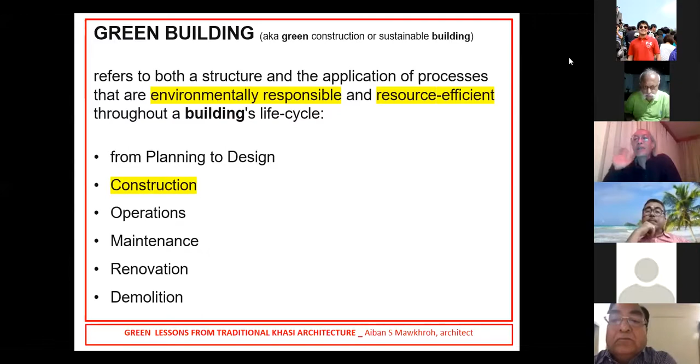Okay, let's go to context now. For people from outside the Northeast, here is the map of Meghalaya with the Brahmaputra to the north. When it comes to traditional architecture, there are basically three typologies. One is the houses of the Wars, who live on the slopes overlooking Bangladesh, you can see Sylhet there in the south. Then there are the Bhois, who have another typology and border Assam, you can see Guwahati to the north. And then you have the traditional architecture of the highlands, the plateau, as Arijit Da had said.

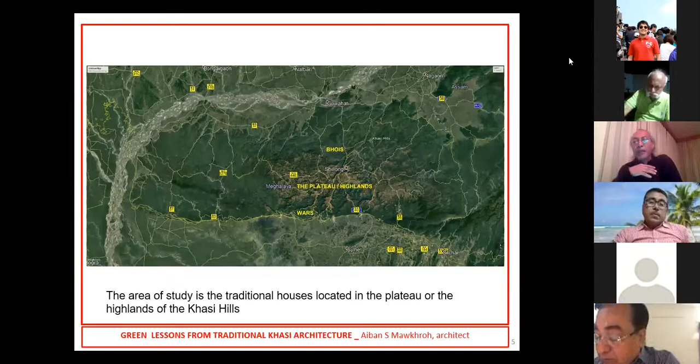These are windswept areas, very hard hit by rains and a lot of wind because of the open ground. There are a lot of climatic parameters these houses had to withstand. Apart from that, this is one of the highest seismic areas in the country. We are right now in zone 5, and we've been hearing earthquakes in recent days, in fact in Mizoram, very close by, with epicenters even near Assam.

So it's windswept, with a lot of rain and a lot of fog. It's very damp. The climatic conditions are very extreme in nature.

For the sake of this paper, I have divided the traditional Khasi house into two types. One is the original Khasi house that our ancestors have given us. The second is the bungalow type house, the post-earthquake house, or the colonial house, the house that the missionaries introduced to us.

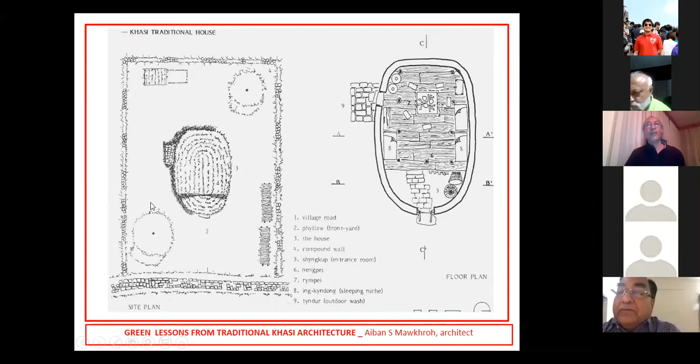So please remember the word I'm using: a U-shaped enclosure, and right at the center sits the traditional house, very egg shaped in plan. In fact the egg shape is so detailed that even the back has been cut, just like if you cut a hard-boiled egg, the top part with the air gap looks exactly like that. So it's a very pure egg shape.

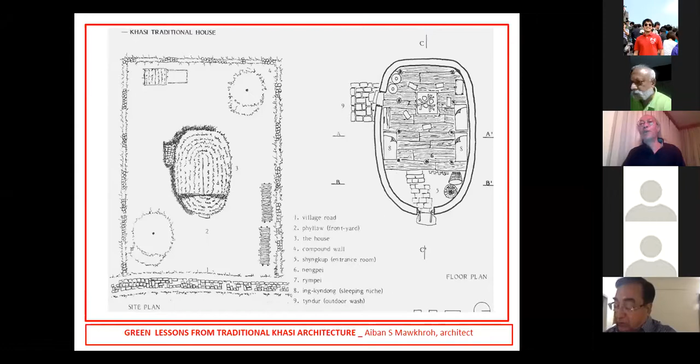We'll talk about the structure later, and just run through the types and variations of the house. In the egg shape, if you see the black dots, those are the columns, and then you have the egg shape of the form, made out of a 2 feet thick limestone wall. Within the plan there are two levels. You enter first into a ground level, which is earth, then you climb up a few steps, 3 feet above, to the habitable area. Those drawings are of planks I've drawn to actual size, I've seen planks that are 2.5 feet in width. So those are plank flooring, elevated from the ground, we'll talk about that later.

Those are the sections and the elevations, they'll come in the other slides too.

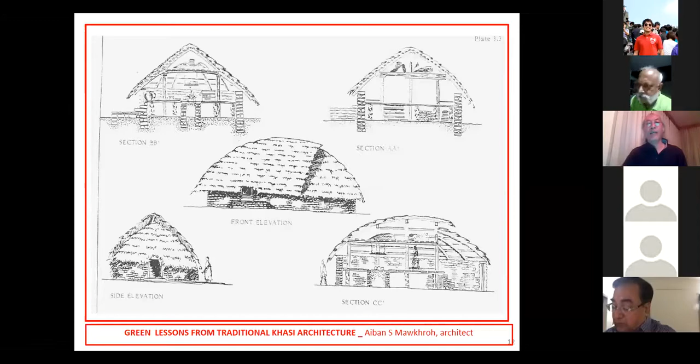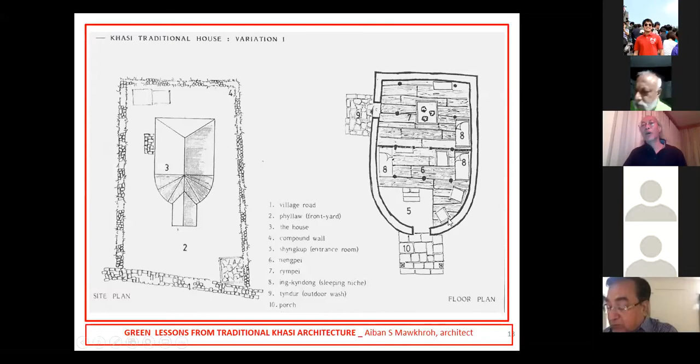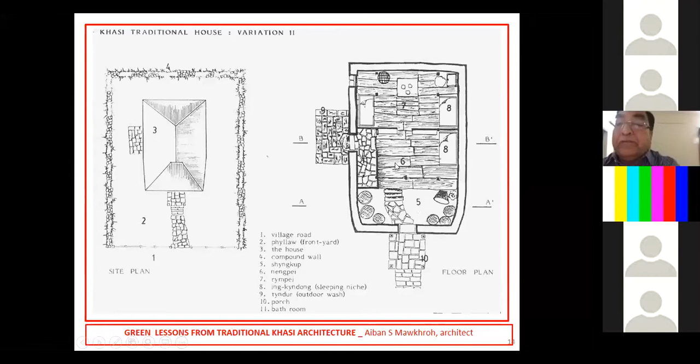This is another variation of the Khasi house. It still has the round front, but they've added the portico and more or less flattened the back, most probably to accommodate tin sheets, since instead of a thatched roof, the roofing is metal. But the interiors are still the same, those black dots are still the columns. Then there's another variation which is totally square, with a roof more like that of the bungalow house, but the interiors are still the same - you enter through a lower level and climb up a couple of steps to reach the habitable area.

So these are the three variations: the pure egg shape, then the variation where the back has been cut a bit and the portico inserted, and the third variation which is totally square with the portico. I guess the reasons for this evolution of the traditional houses is because of materials, changing from thatch to metal, and adding the portico maybe to imitate the bungalow type houses that missionaries or the British built for themselves. I guess in culture these things happen.

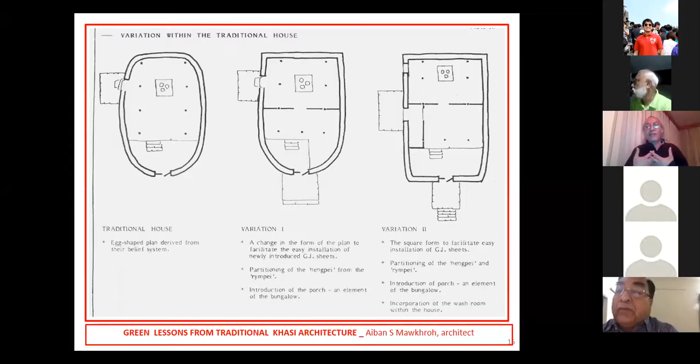So we should delve more into this, which is actually the core of what this entire topic is about. We can look at the plan in more detail, as I've mentioned - there are two structural systems here.

You have a post and beam structural system, which holds the roof. Then you also have a load-bearing wall, which holds only the eaves of the roof.

When I look at this and compare it to modern architecture, most new buildings now have an envelope where you have the columns inside, and then an envelope of either steel or glass, and then you have to AC the entire thing. So even the Khasis have this—you have the basic post and beam construction, and you have the walls on either side, an envelope of walls that surround the entire building.

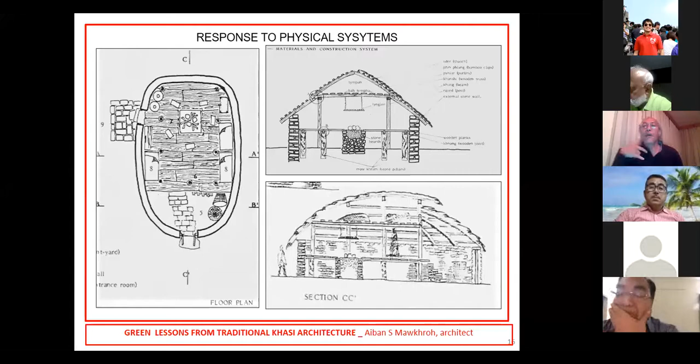The reason for this is that, being a seismic area, the post and beam construction is actually the ideal construction technology to take care of the seismic forces. But then you also have the other elements of rain and wind to deal with.

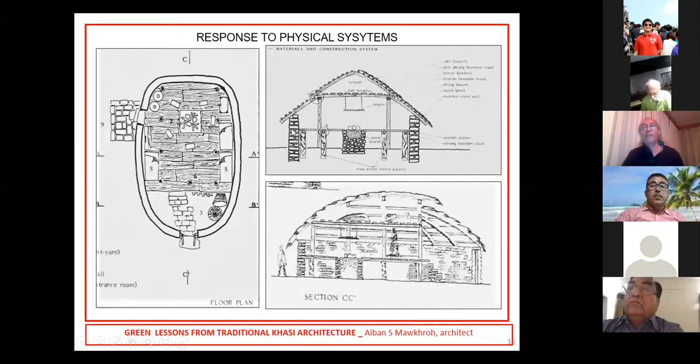Strangely, what the Khasis do is when you enter through the doorway, a very narrow door, you first land up at the ground level, which is the storage area, where people store their implements. In fact, you have your chickens and your dogs at the first part of the entrance. Then as you climb up the steps, you reach the habitable part of the house.

The Khasis used to call this edge, the division between what they call the shinko, the ground level, and that edge is called the shakso, which literally means the permissible area for the dog. So you actually move from the profane to the most sacred part of the house, which is the habitable part.

When you look at the plan of the raised platform, the spatial area is divided by these rows of columns, and also the hearth at the center. So you have the bedrooms at the sides, between the column line and the wall, and you have the living area, which is around the fire.

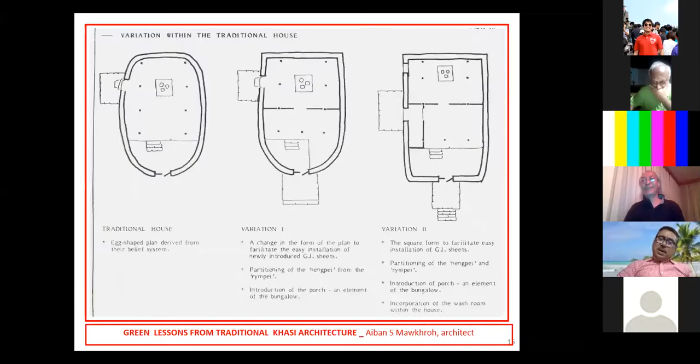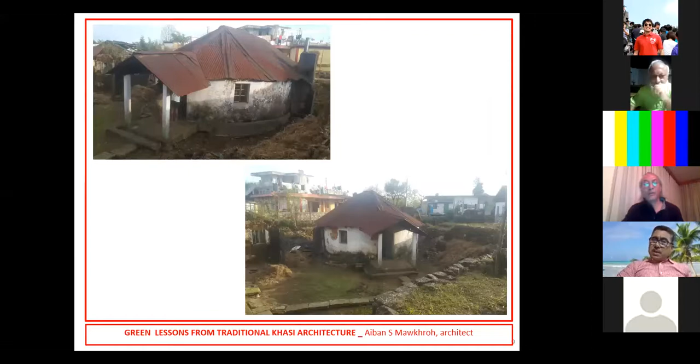We think we have learned a lot about earthquake engineering using computer analysis and whatnot, but when we look at traditional knowledge, people have learned through suffering. They might have suffered, and they understood how to build a better house before the next earthquake. But because materials are becoming similar everywhere nowadays, that's why we're reaching out to this traditional architecture, which is also based on very good structural concepts. So yeah, it's quite interesting.

Is this the first time you have learned about this, Dr. Jayant? Not really, but the way you are explaining it, this has not been explained to me by anyone else before. Today it's been a huge learning experience attending your lecture. There is so much knowledge in traditional architecture and construction that we have been ignoring over the years, and we should actually go back and try to find out. Maybe the solution is there to look at. That's what I feel. Thank you very much for bringing it up.

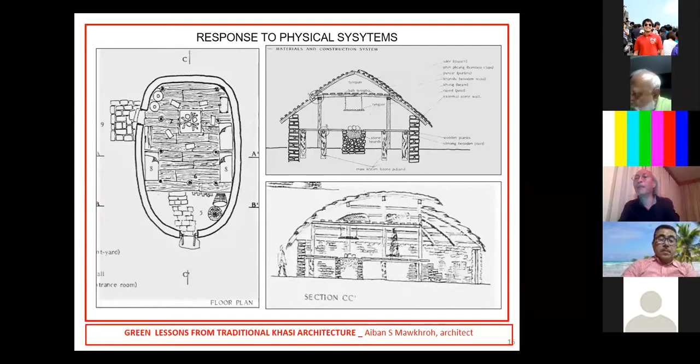This is because in the pre-monsoons in Shillong, not the monsoons themselves, almost a month before the monsoons there's a lot of lightning. I call it the sound and light show, with the sound of the wind and the lightning. I think the reason why people don't use metal too much is to not attract lightning, because the traditional houses are made of thatch.

So can I carry on now? One more thing is that the doors and everything are all pivoted, not with any metal hinge. Everything is wooden. Okay, carry on please.

So these are the pictures of the interior spaces. If you recall, you have the steps which lead from the shinkop. The shinkop is actually the storage area, the first space as one enters in the section. It's at ground level but enclosed, like an enclosed veranda. So you enter the house and you have the storage space.

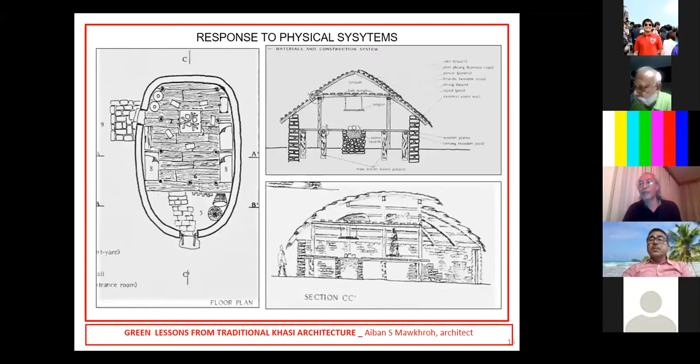Then you climb up a few steps to where the habitable part of the house is. If you notice the column, there's one column right at the edge of the steps. Very strange, that's a non-structural column. I mean, it doesn't hold the structure at all. The Khasis call it Rishot Blei, which means a sacred post, where rituals are done around it. As you can see in the drawing, it doesn't hold up the roof or anything at all.

So that is where the shakso, or the permissible area of the dog. What the Khasis are trying to say is that henceforth, as soon as you enter the platform, this is the most sacred area of the house, the habitable part, and animals are not allowed beyond this point. As I mentioned earlier, a lot of my thesis is on the cultural and belief systems of the Khasis, so that's where it comes in.

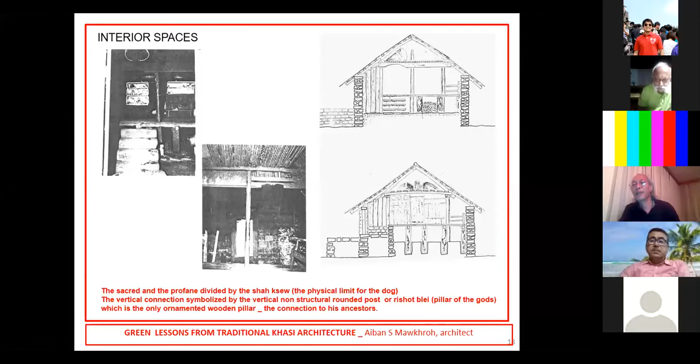Those are a little bit of detailing for engineers. You have the post and beam construction, and it's really interesting because since nails are not used, everything is done on carpentry, right from half cuts. Yeah, and that's the post and beam structural system.

You have the rafters, then you have the extension of the eaves, which rest on the limestone walls at the sides. That's a small detailing of the limestone pillars which hold the joists. In fact, the limestone pillars have a little niche at the top so that the joist doesn't move. This construction, talking about these limestone pillars and joists, is still being used now in a lot of villages in the outskirts of Shillong, especially the far-flung villages.

In fact, I've just done recently for a friend of mine who's got a resort in Barapani - he's got these tents, so the entire tent sits on this wooden platform, and we have used the same technology.

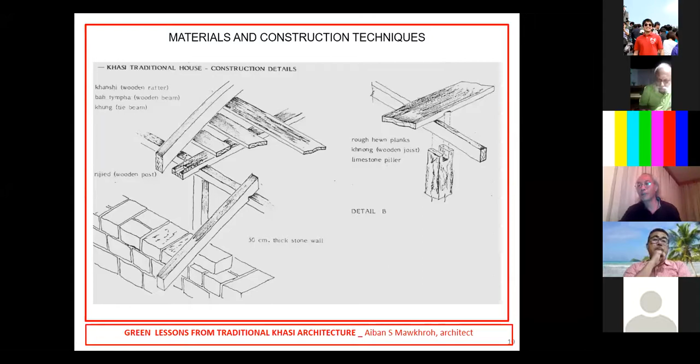These are pictures of that house which I showed you earlier. As you can see in the first photograph, there's a gap between the post and beam structural system and the load bearing walls at the sides. In between is where the beds are placed, and the post and beam takes care of the roofing. This is the shah ksew.

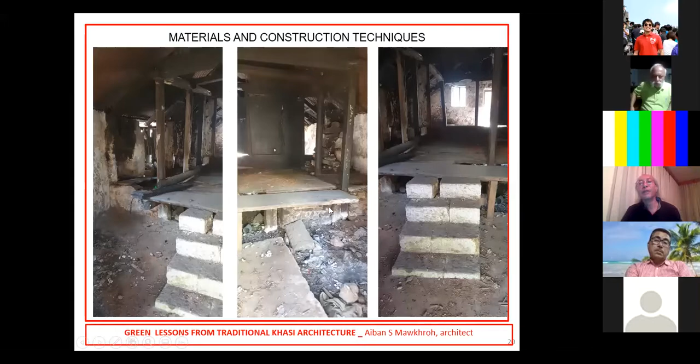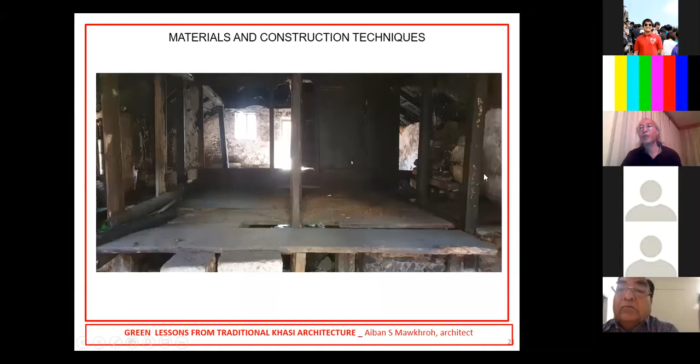You can see those steps going up to the platform, and you can still see little bits of the limestone pillars that hold up the flooring system. This is a picture of where you can see the long line of columns that divides the post and beam structural system from the load bearing walls, so in that gap there.

These are the three bungalow type houses which I've taken as my case study, and you've noticed the portico in front.

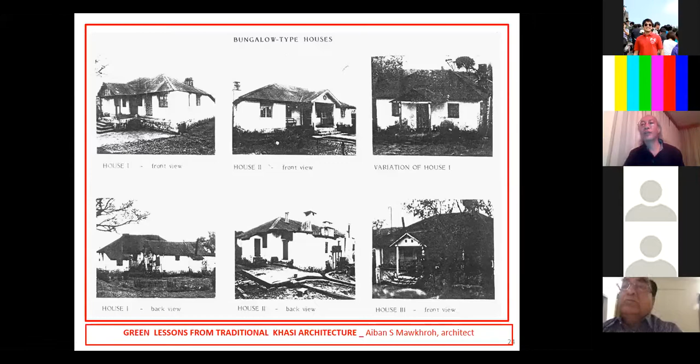These are the two houses which are still standing, the bungalow type houses I'll be talking about. You have the portico with the veranda in front. The one on the right is a beautiful house, very well maintained, still standing - in fact I think the owners have turned it into a bed and breakfast house.

That's another variation. Unfortunately this house has been dismantled, but thank God I managed to document the building at least.

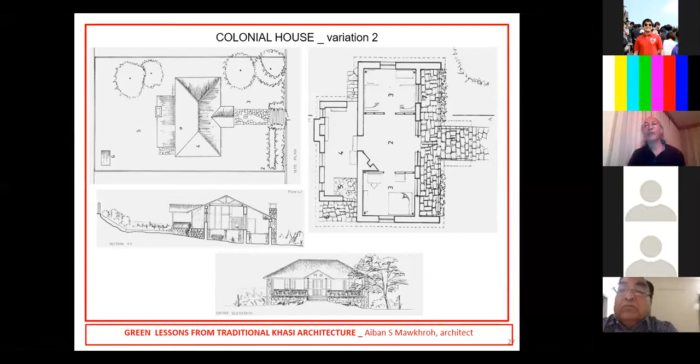This is the elaborate house. I forgot to mention that inside the bungalow house, can you see the small dots? Those are the columns - the post and beam system is still prevalent here, holding up the house. We'll talk about that in section. And then you have the external walls that take care of the other elements. But the only difference here is that the gap between the columns and the wall has become just 4 inches - in fact the columns are almost beside the wall.

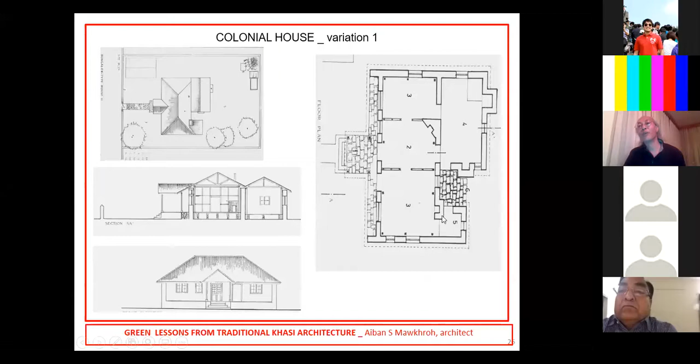Now even in the earlier house, if you notice, you still have the columns exposed inside the house. And the third house, this beautiful house, if you notice, there are no columns. The reason for this is because the owner of this house happened to be a contractor.

In the mid 19th century, in the 1840s or 1850s, there was talk of bringing the railway from Sylhet to Cherrapunji. As an East India company, they're not interested in bringing passengers - for them it's basically exploitation, how to exploit limestone as fast as possible, to take the limestone directly from Cherrapunji from the hills right up to Sylhet. So there were plans, and in fact the remnants of the engine of the train are still there. The David Scott Trail coming from Sobar, from the plains of Bangladesh, and the path is still there.

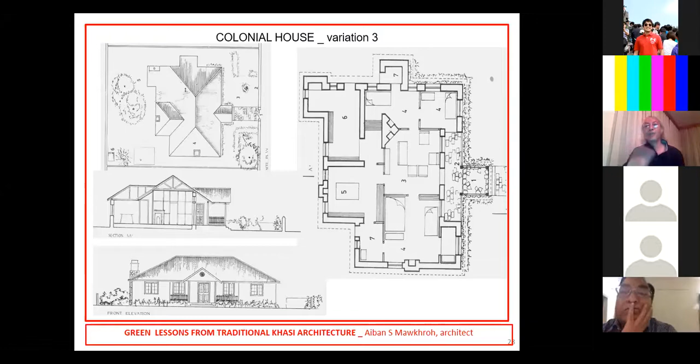So they were planning not to bring the railway per se, but more or less like a goods carriage, like one of those they have in the mines. It failed apparently because of the steep slope. So this gentleman who owns this house happened to be a contractor - he bought the steel, he bought the railway tracks, and he used the railway tracks as columns. The columns are embedded inside the double brick wall envelope, that's why you don't see the columns anymore - they're inside. I've lost pictures of those columns because you can only see them when they touch the roof, when they touch the ceiling. So this is a more elaborate house, which I mentioned earlier has been turned into a homestay.

A slide of the 3 variants of the house.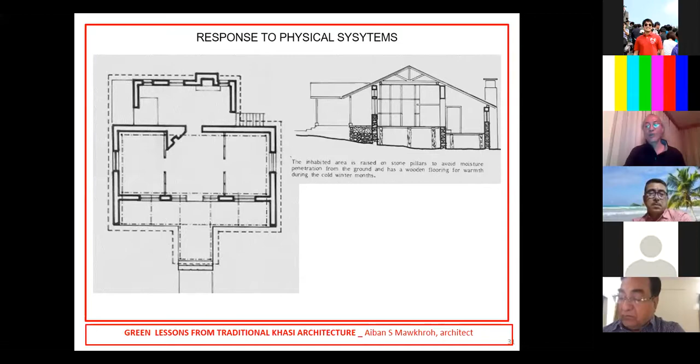But the only difference between this section and the traditional house is that the gap between the post and beam structural system and the retaining wall—the gap is more in the old traditional house, like 4 feet. Right now it's almost bang close to the walls. I'll show you photographs of this. These are the slight detailing I talked about—see the columns which are very close, the post and beam structural system very close to the retaining walls.

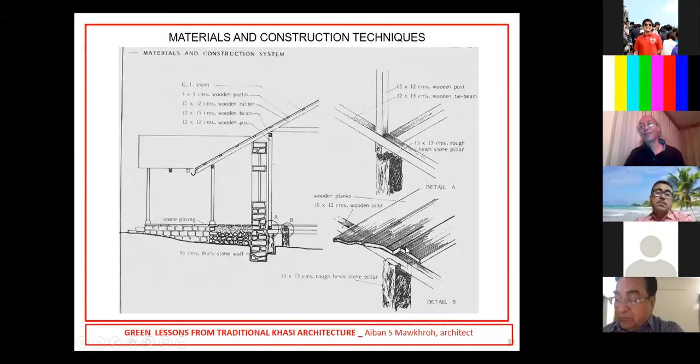You still have the detailing the same regarding flooring. Those are pictures of the houses, the bungalow type houses.

This entire compound belongs to a family that used to make liquor—they used to brew liquor for the East India Company. In fact, they still have a certificate from the East India Company saying that they were allowed to brew liquor for their soldiers. Because if you remember, the East India Company had used Sora as a sanatorium for the soldiers to stay, so they used to brew liquor here.

We are trying to turn this entire compound into a museum because it's very interesting—in the same museum you have the post and beam house, the post-earthquake house, and still the traditional house. So I was telling this friend of mine that I'll knock off this portico so that you get the rear.

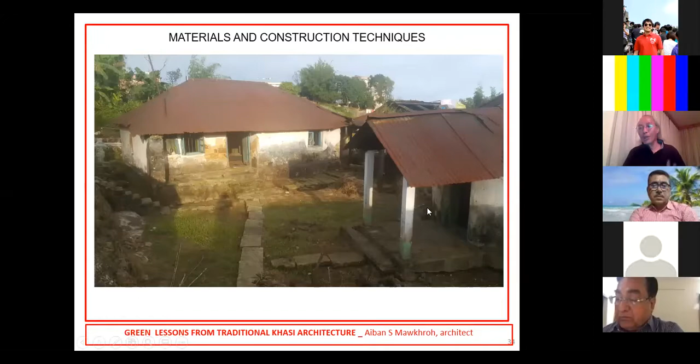These are the pictures of that post and beam house. As you can see clearly here, the post and beam structural system is very close to the wall, and the wall takes care of only the elements. You can see it very clearly here.

So that's a little thing about the post-earthquake houses. Dr. Jayant, anything you want to say?

Yes, it's so interesting to see how the cladding or the elements were integrated into the structural system, and they knew that timber is better for seismic performance. Timber is definitely better, and if you look at the interest in timber even today in Canada and the US, people are trying to build multi-story timber houses now. Timber has the inherent property of being very ductile, able to take a lot of deformation, and the performance of Assam-type houses during both earthquakes has been tremendously wonderful.

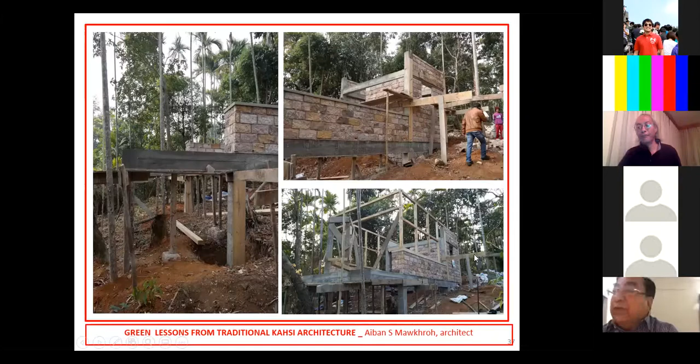For the main structure I've used RCC columns just to take care of the flooring, and then you have the wooden frame at the top - a basic Assam-type wooden frame for the bedrooms. The roofing system is typical Assam-type, with the entire roofing system sitting on this grid framework.

For the false ceiling, we have tried to use palm - that's the palm leaf, or actually the trunk of the palm tree. We've used that as a false ceiling.

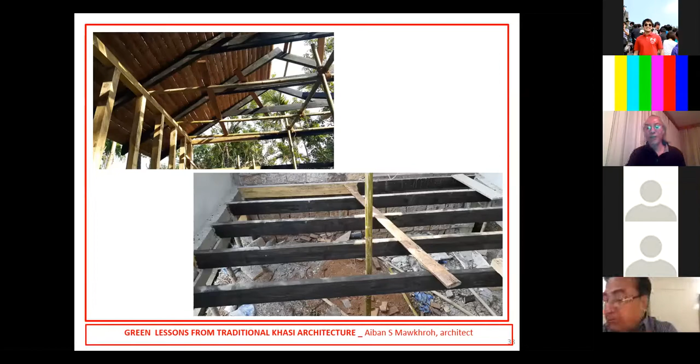For the flooring, we have used normal joists and painted them with mobile oil to take care of termites. Over the palm leaf, over the joist, we have laid a 19mm waterproof block board, which we have painted again. And on the wooden frame, we used a cement panel board on the inside.

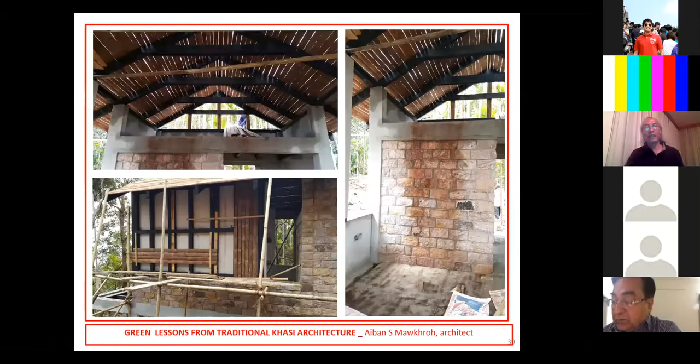For the outside, we have tried to use different types of palm. In this photograph, we tried to find out whether it looks nicer in horizontal or vertical format. The gap in between we filled with thermocol, the cheapest insulation available.

Over the 19mm block board, we have used areca - the bark of the areca or guai tree. We sliced the bark and just nailed it. When I told my contractor to just nail the areca bark onto the floor, he said, sir, I can't nail it because it's so hard I had to use a screw. That's the areca flooring.

Over the roofing system, we covered it with a sheet of aluminum, and then laid the bamboo framework for the thatch. So in this project, we have tried as much as possible to use local materials and local construction techniques, which the laborers from the villages already know.

In fact, the only time we brought in guys from Shillong was for the plumbing and tile work, but all the stone work, the wood work, everything is done by the locals. This is about trying to use as much local technology and local craftsmen as possible.

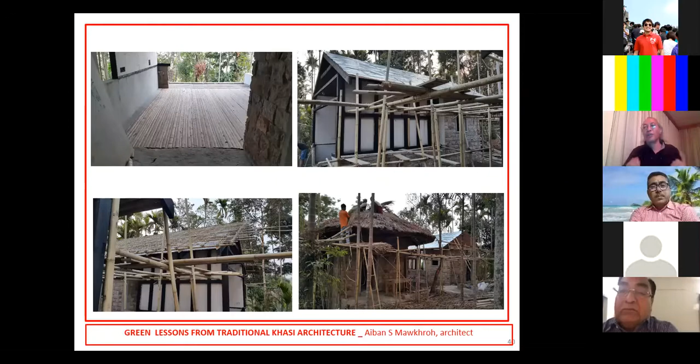I always believe that sustainability of a building starts from construction. I believe that whenever there's a project in rural areas, the money you get for the project, right from day one - which means construction - should be distributed within the village itself. Forget about operations and how you get money when you operate it, but right from construction, the money should circulate within the village. The only way for it to stay within the village is to use local materials and local craftsmen.

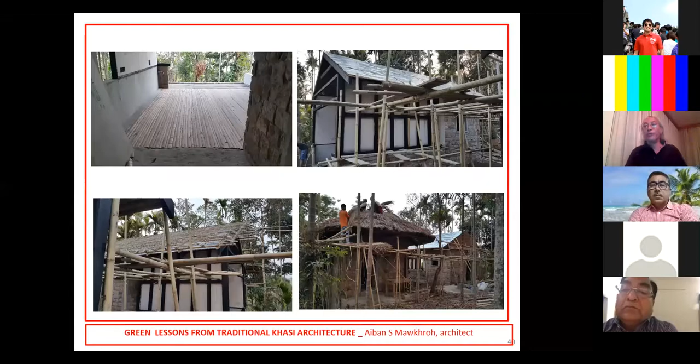So that's how it looks at the end - the stone wall, the Cherrapunji stone.

That's how it looks at the end. So we polished the bark. Now the interiors we did a little more slick because we have the cement board, which is white. That's how it looks after the polishing, so it looks very nice. In fact, one of the clients was saying it's almost like an acupuncture flooring, because it's not even.

The next is other traditional built forms of the Khasis. I'll run through this as fast as possible. The Khasis are very well known for their stone work. They are very good craftsmen.

It's called the Garden of Caves at this village called Lat Mausiang. You should go there when things are good, you should visit this park. It's beautiful, it's well done. The stone craftsmanship is of the highest quality.

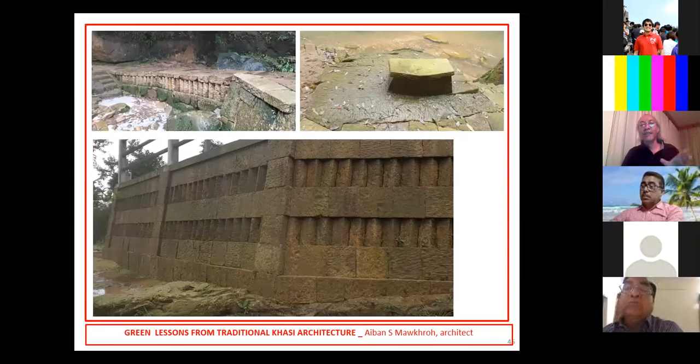On the right, there's the stone bench, which is actually carved from a big boulder. So what this gentleman has done is he carved this bench, cut off the negative sides and formed a bench. Then there's the treatment of the retaining walls. For architects out there, this reminds me of Mario Botta's work, the famous Swiss architect. He uses a lot of these patterns when he makes these brick walls.

In the Khasi Hills, we also have these structures called kors. These are resting places which the Khasis used to make, either on top of the hill or midway in the hill, and these are monuments for a dead person, for a relative who died.

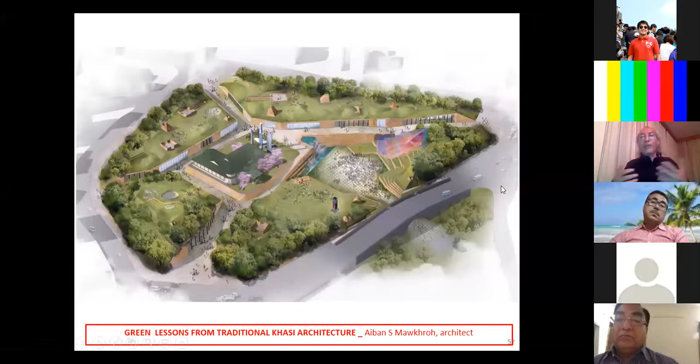We have covered the roof with earth, so it becomes a meadowland. Surrounding the site, we have proposed to plant a lot of indigenous trees, just to have an echo of the sacred groves, which is one of the very important elements of our culture. On the meadows, we have decided to have the kors — you can see the kors and the monoliths. So this is a small attempt of ours to create a microcosm of our built heritage in the middle of Shillong. That's how it looks.

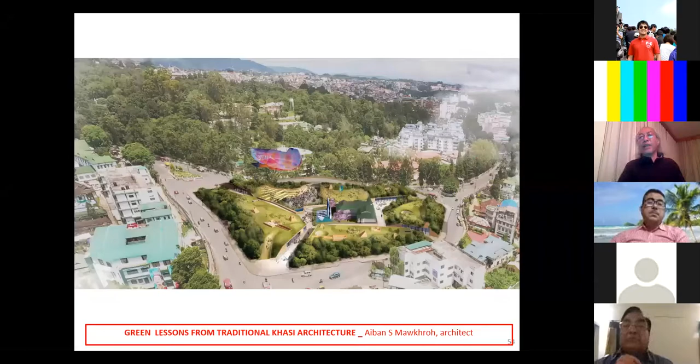This is Barik with the civil hospital on the left. Then you have the State Central Library. What we have done in this project is combine the State Central Library with the new site by having an overpass.

So thank you. That ends my pretty long presentation, but I hope no one has left the building.

So guys, how many have left? No, everyone is there. People are shifting from Zoom to Facebook. A lot of youngsters like to be on Facebook. So I was monitoring side by side what's happening on the Facebook Live, and sometimes I can see if two persons have left here and another four persons are joining there. So yes, thank you so much.

Thank you so much. I forgot to respond when you stopped talking — things were going through my mind, I forgot to unmute myself and respond to you either. It's okay, it's been really, really wonderful. Thank you, Doctor. I wish you could go on for another hour so I could know more and more about this wonderful cultural and architectural heritage of our beautiful state, Meghalaya.

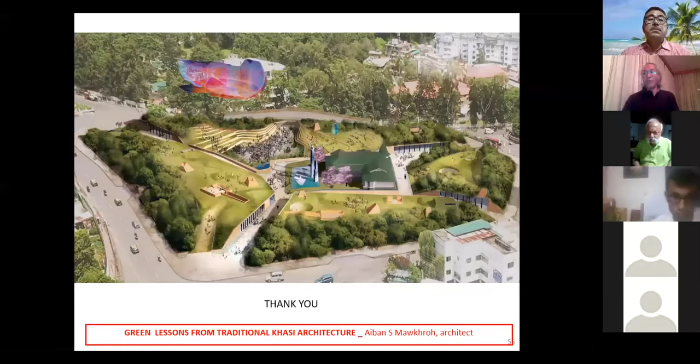Good question, because the 2-foot thick stone walls also insulate the building. What happens is that the interior of the house is very warm because of the fireplace, and the fire does two things: one is heat up the house, and the other is preserve the timber inside, especially the bamboo scaffolding that holds up the roof. The main structure of the roof is wooden, but there's also another layer of bamboo that holds up the thatch. So the fire warms the house, and the stone wall insulates it. In fact, the insulation they use is lime, because lime is easily available in the Khasi Hills. So they use lime mortar as insulation for the stone walls. I hope I've answered that.

Maybe I can answer later on Facebook. There's another question here which also asks about the egg-shaped housing plan. The two examples that you had shown in Sora, in the same compound, one with the post-earthquake design Assam type, and the other one the egg-shaped house—now both of them are still there, equally there. So it proves that the egg-shaped house, because of its shape, that is why maybe it had withstood the earthquake.

Yeah, okay. No. Elliptical shape, which has... Yeah, so Arijit, there is a school of thought that says the reason for the egg shape is aerodynamic, to take care of the wind.

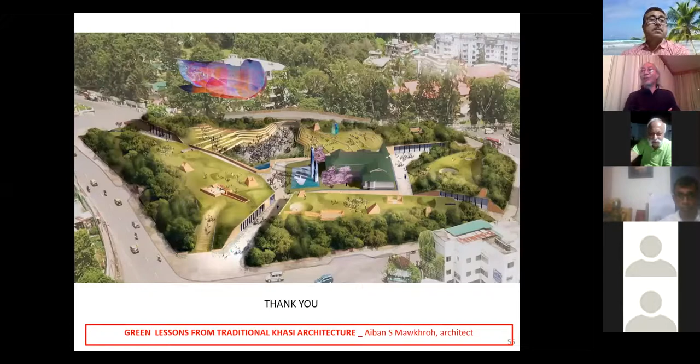I differ from that, because when I went to Lankawet village and saw these houses, they're not really facing west or southwest toward the wind direction, but haphazard. So my thesis, which I'll talk about in a different lecture when I discuss the meaning in Khasi house, is where I can bring up this topic of the reason for the form. The egg plays a very, very important role in our rituals and ceremonies.

For example, that house you talked about, the Queen's house - the ritual they do at the end of the dance, they used to cut the egg to see. The broken egg shows the signs of whether it's going to be a good harvest or a bad harvest. So the egg plays a very important role here.

That's the reason for my hypothesis, that the egg shape is because of that. Through the detailing, even when you cut a hard-boiled egg, the top part, the air gap, is flat - they've gone to that. So my hypothesis is that the reason for the egg shape is because of a belief system.

So maybe in another presentation I'll talk more on the meaning in Khasi house form, where I'll address the shape of the egg, the reason for the movement from outside to inside, the profane and the sacred part of the house. That was actually my thesis, and this presentation is just one-third of it, because a lot of my thesis is on the cultural and belief system of the Khasis and how it influences the form of the house.